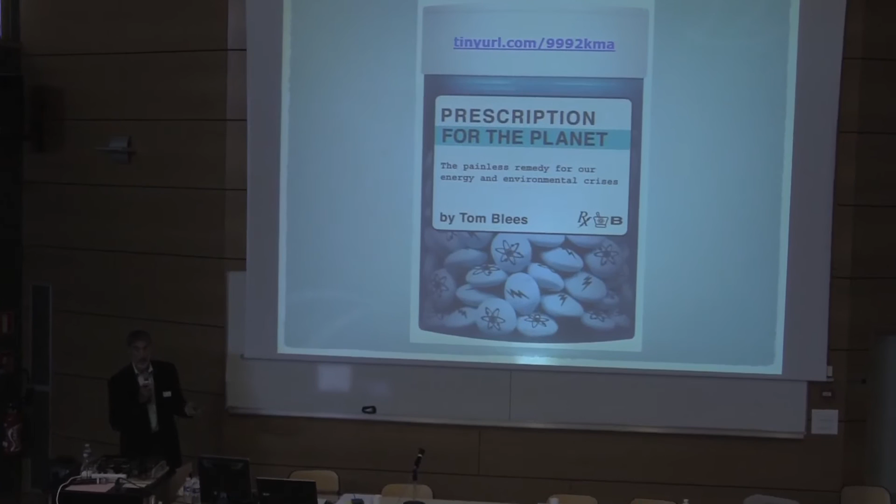I started this with a book that I wrote and published in 2008. The URL on top, you can download the book for free if you'd like, and it talks a lot about the integral fast reactor. And these slides will be available if you want them.

After I wrote the book, the two people who were my main tutors - I'm not a nuclear physicist or an engineer, I was a commercial fisherman actually for 20 years. When the people who were directing the project at Argonne National Laboratories found out I was going to write a book about this, they wanted to make sure it would be absolutely accurate. So they tutored me in reactor design, reactor engineering and physics for about 9 years.

And after my book came out, a couple of years later, they decided we should write a book too. So they wrote this book that tells the story about how this reactor was developed, and you can also download that book for free at that URL on the top.

What happened was I had found out about the integral fast reactor when I was writing a novel, and when I realized that this fantastic technology existed that could essentially power the whole planet with fuel that we've already got out of the ground for thousands of years, I decided to write the book.

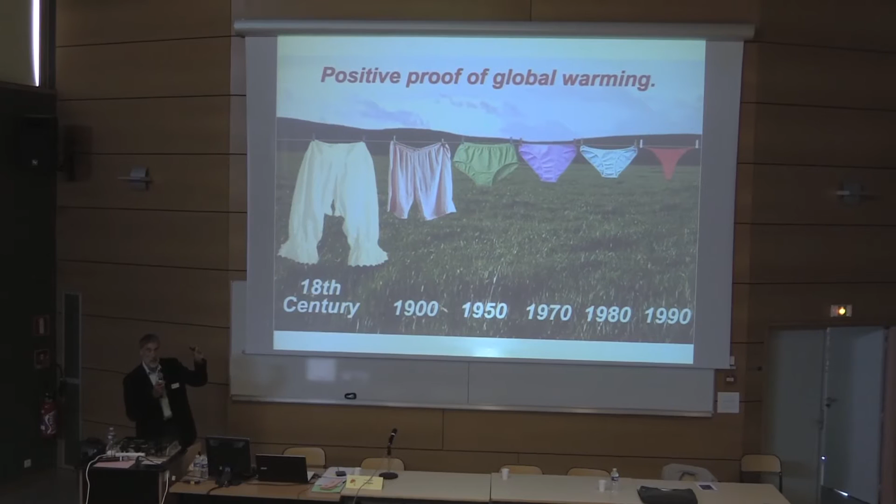Now, one of the reasons why I wanted to write the book was because of global warming, which in the United States a lot of people don't believe in, but we have proof. And like many graphs, sometimes the data gets so small that you can't see it anymore, so I had to stop at 1990. Now we have to look in.

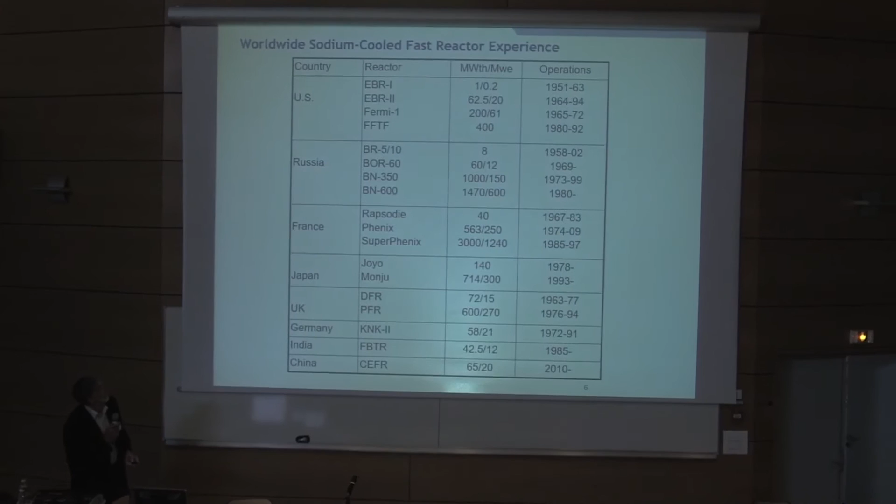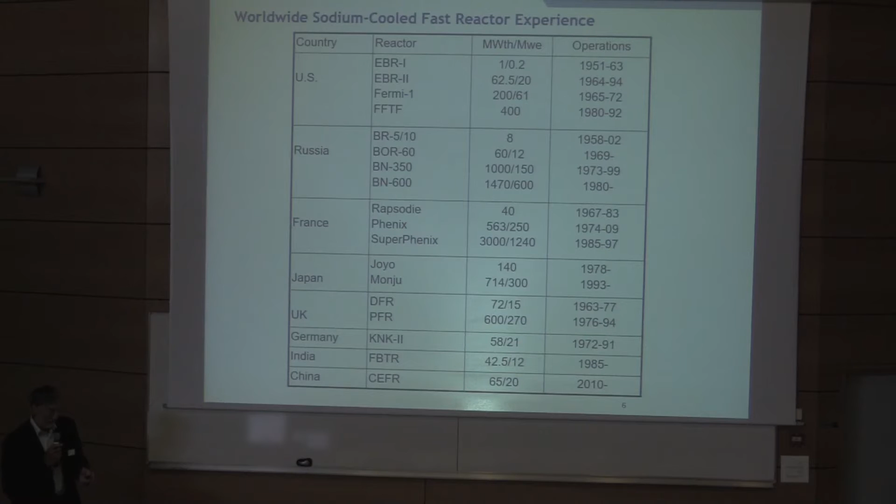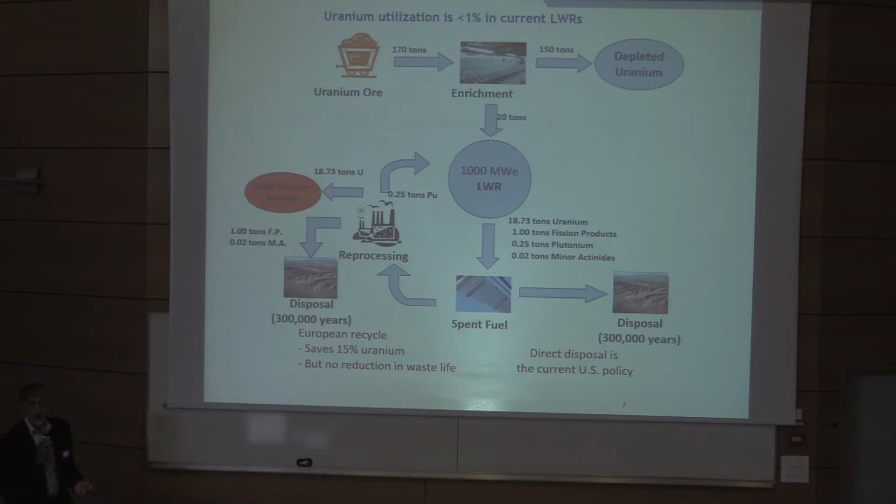Now there's a lot of experience with fast reactors around the world, over 350 reactor years of experience. These are the ones, most of them you've already probably heard of. And in the beginning, when the first electricity that was produced from nuclear power was produced from a fast reactor, the EBR-1. And the scientists at that time thought uranium was very rare and that fast reactors would just be the way that everybody would do this in the future.

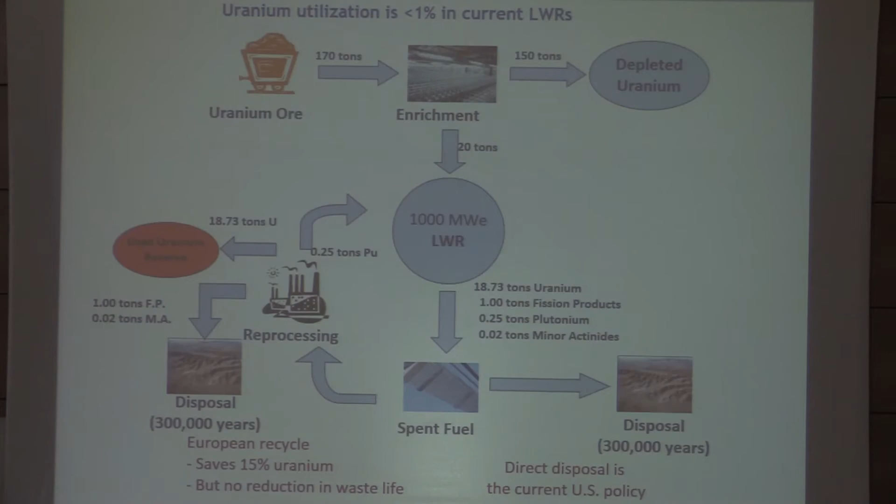But light water reactors ended up being developed for the submarines, and then they just scaled them up. So the utilization of uranium is very poor, and you have to store the waste for hundreds of thousands of years. Whereas with the integral fast reactor and pyroprocessing, the disposal time is about 300 years. And it's in a form that's ceramic or metal or glass that won't leach into the environment until long after the radioactivity has reduced to below the level of natural uranium.

I'm not going to go through every bit of these, but like I say, I'll make the slides available. I can email them to you or whatever, if you wish.

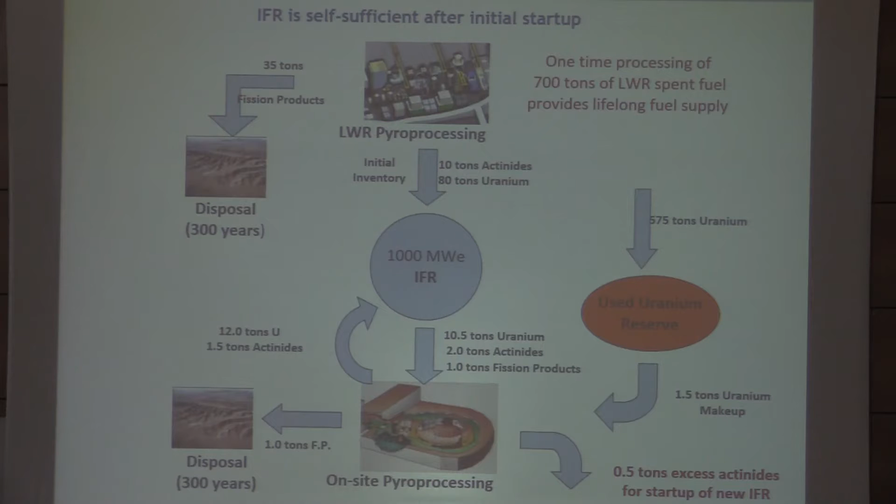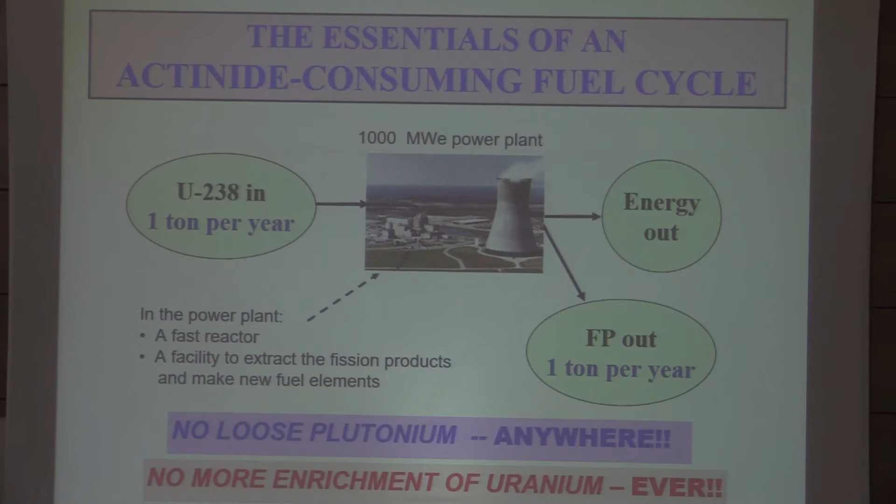So basically, this is the long and the short of it. To run a 1 gigawatt fast reactor, you bring in 1 ton of depleted uranium every year, and that's about 2 milk crates full. Depleted uranium is safe enough you could carry it in, except you can't carry a milk crate full of uranium because it's a half a ton - you have to do it with a forklift or something. But you don't end up with plutonium, with separated plutonium anywhere, and you don't ever have to enrich uranium anymore.

So the integral fast reactor project started at what's now called Idaho National Laboratory. It was Argonne National Laboratory West. And they built this reactor in 1964. They fired it up, and they ran it for 30 years.

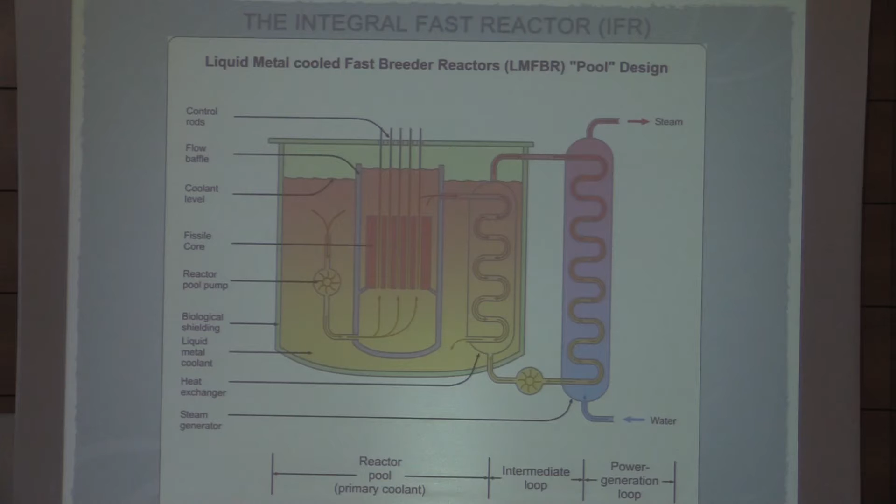This is a diagram similar to what Nicholas had. It basically shows the simplicity of a pool-type system, which operates at atmospheric pressure and is in a separate structure from the water side of the heat exchanger, so you don't have a problem with water-sodium interaction.

Now, when Charles Till decided that he was going to try to solve all the problems associated with nuclear power, he really wanted to use metal for fuel instead of oxide for a number of reasons, safety reasons, economic reasons, and practicality. The problem was that when metal fuel is fissioning, it swells up about 40%.

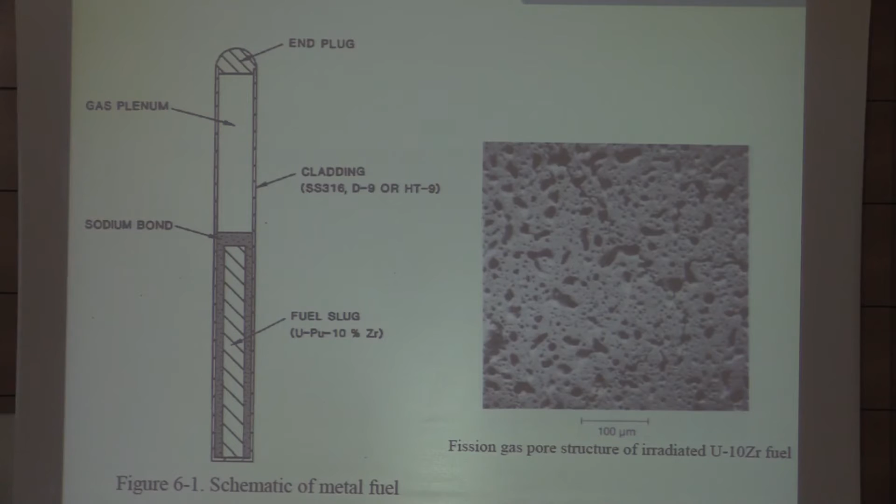And so when they first started to try it, they would just get maybe 1% burn up, and then the cladding would break. When he decided he was going to try to go back and look at this, the fast reactor project at Dounreay in the UK, the people there had been trying to figure out how to use metal for a long time.

And they said, don't bother, we've tried it, you're never going to get it to work. You can't get enough burn up, it's going to break your cladding. And so he decided he was going to still try it. So one day, they were sitting around in the office trying to figure out how they could do this.

And somebody said, well, we've got sodium on the outside. We're using sodium because it transfers heat extremely efficiently. So why don't we just make the fuel pins 40% smaller and put sodium inside the cladding? That way, the heat will be transferred from the fuel pin, and as it swells up, it'll transfer the heat.

So you don't have to machine it like you do with oxide fuel pellets, where you machine these pellets down to within microns. This way you could just put in a fuel pellet, say 4 inches, plus or minus 2 inches. It's extremely simple because it's got all kinds of space in there.

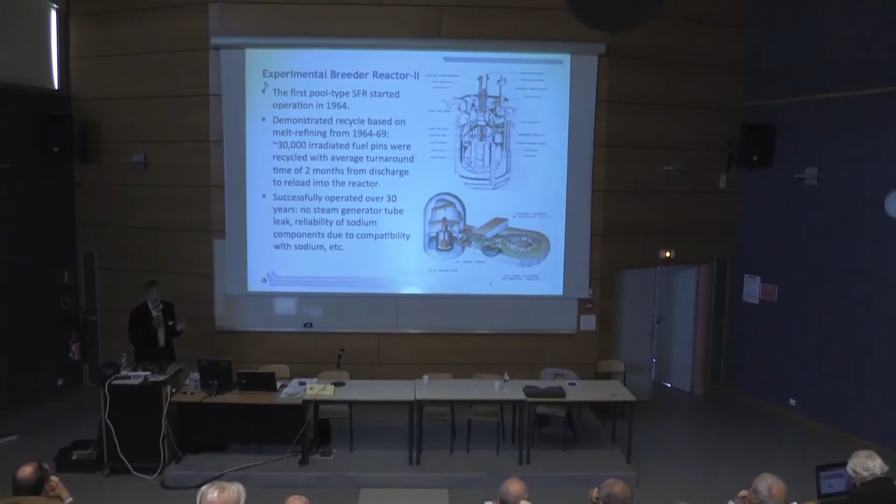They recycled over 30,000 fuel pins using this technology. So I've heard many people say that we don't know how to do this, but we absolutely know how to do this.

When the project was shut down in 1994, it was in its very last stage. The next step was to design a commercial scale recycling plant to recycle this fuel. But at the time, the US was going to put all their spent fuel from light water reactors into Yucca Mountain, so the Department of Energy told the people at Argonne: don't design this to recycle oxide fuel, just metal fuel. That was the constraint they were working under.

Then they shut down the project for political reasons, and they buried it. The Department of Energy even suppressed the information until I wrote my book.

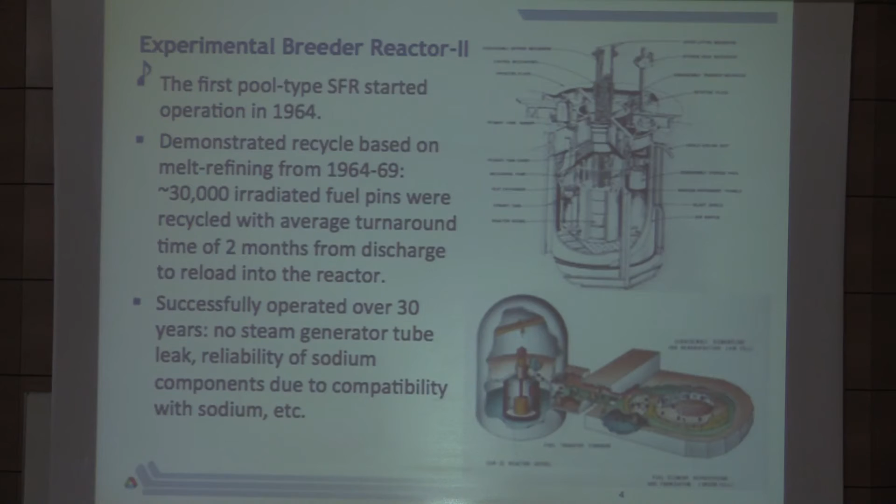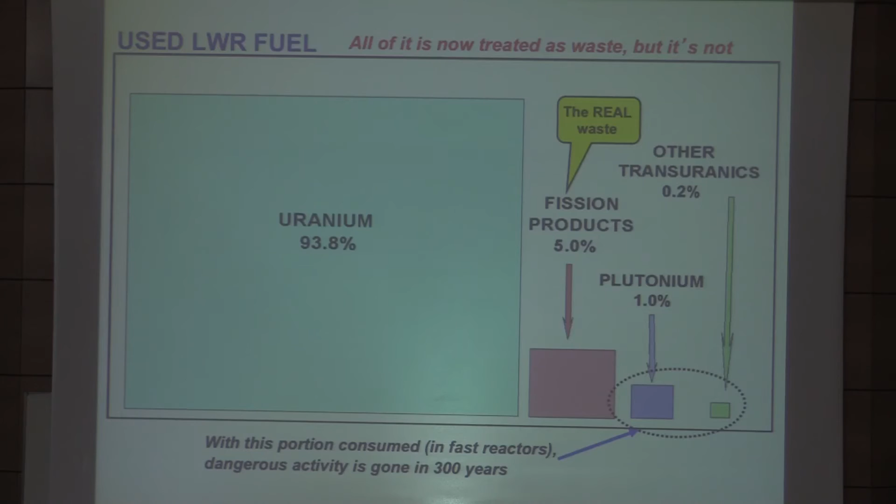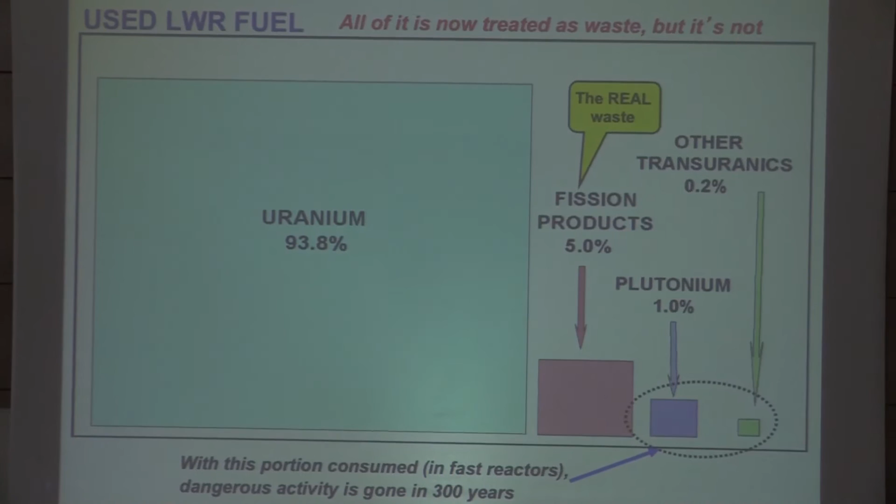So what you're looking at with the used fuel is a very small amount: 1% plutonium, 5% fission products that you want to get rid of. That's your real waste, but it's not radioactive for that long.

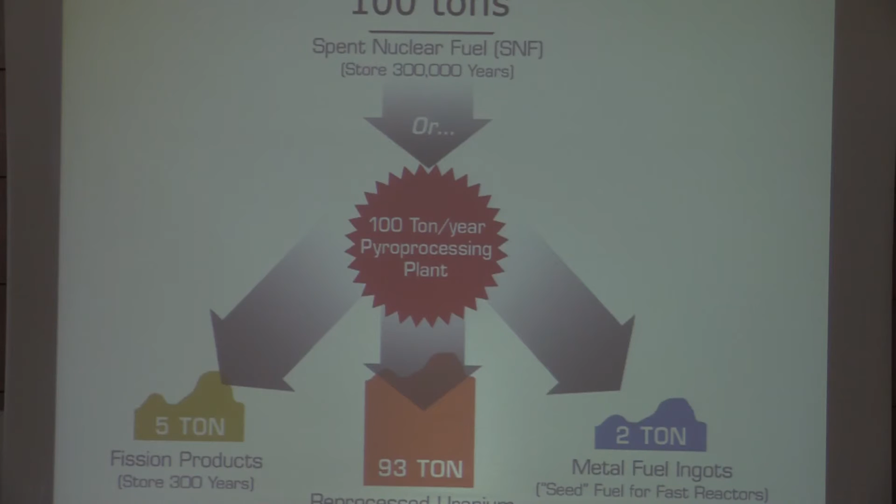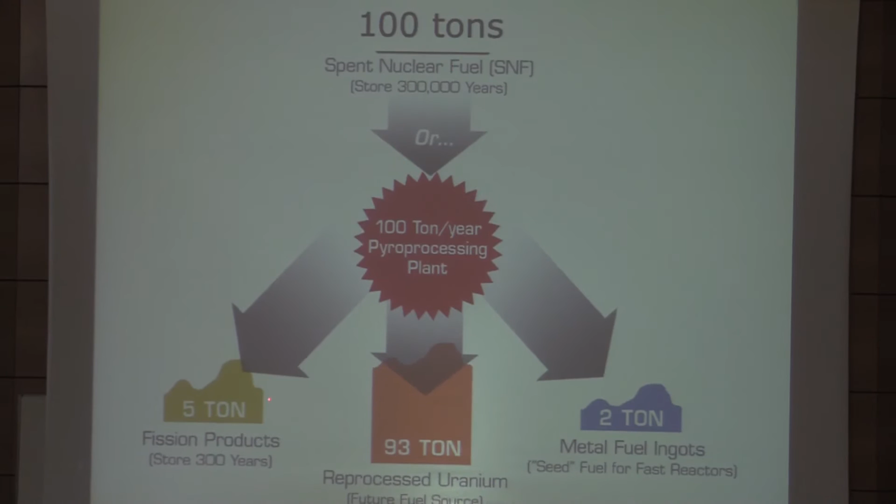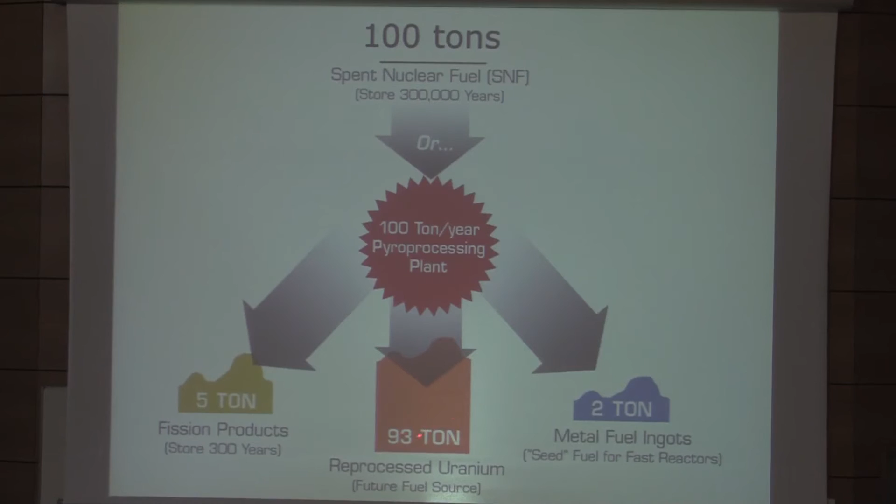The idea was to design a recycling plant that could handle 100 tons per year. If you do that, you get 5 tons of fission products that you just have to store for 300 years, and you can bury it virtually anywhere because it won't leach anything into the environment. And you get 2 tons of fuel, and 93 tons of reprocessed uranium, which is easy to store, and we have plenty of it.

About 3.5 years ago, we had a meeting with the Secretary of Energy and proposed that we design this, basically taking up where the project left off in 1994, restarting it and designing a 100-ton-per-year recycling facility. The Department of Energy agreed, and so the first 2 years of the project we did the conceptual design, and now they're doing the final design, which will be finished next year. Then we'll be ready to build this.

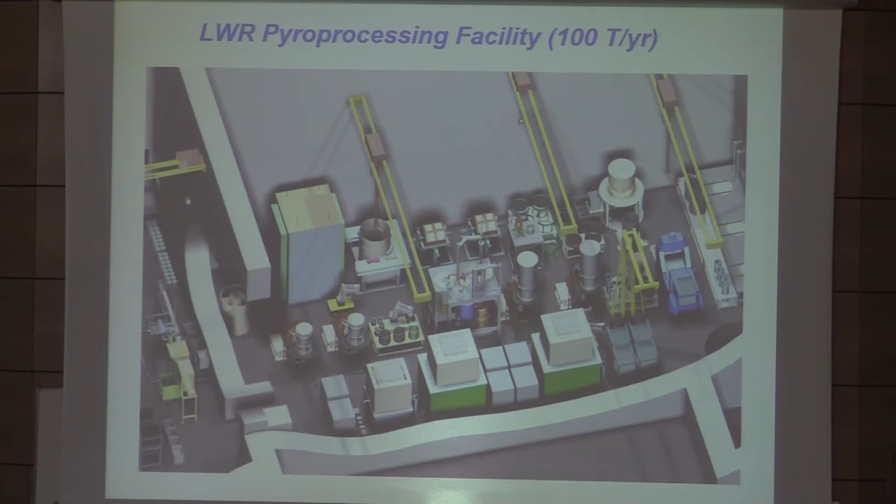It's very, very simple compared to aqueous reprocessing, which, you know, many of you have probably been to La Hague and seen the huge recycling facility. It looks like a city, but two-thirds of it is underground. This thing you can put in almost a large garage. It's not very big at all. And it'll be quite cheap.

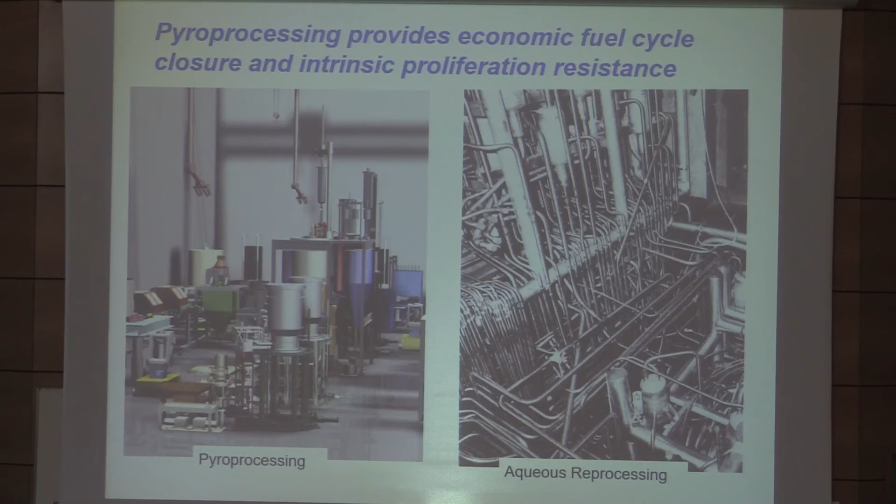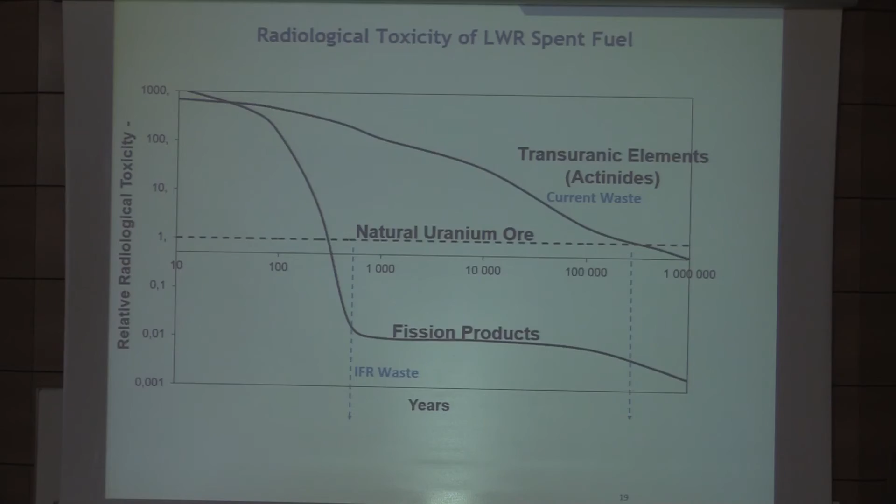But one of the important things about this is it essentially solves the million-year waste problem. Now, those of you who are engineers or scientists understand that nuclear waste is really not a problem even the way it is today. There's so little of it, it's easy to store. But it's a public perception problem. So if you want nuclear power to be powering the world, a big part of making the public aware that this isn't a problem is finding a way to solve it.

This is a logarithmic scale. It's about 300 years by the time you get to the level of natural uranium ore if you recycle it using pyroprocessing.

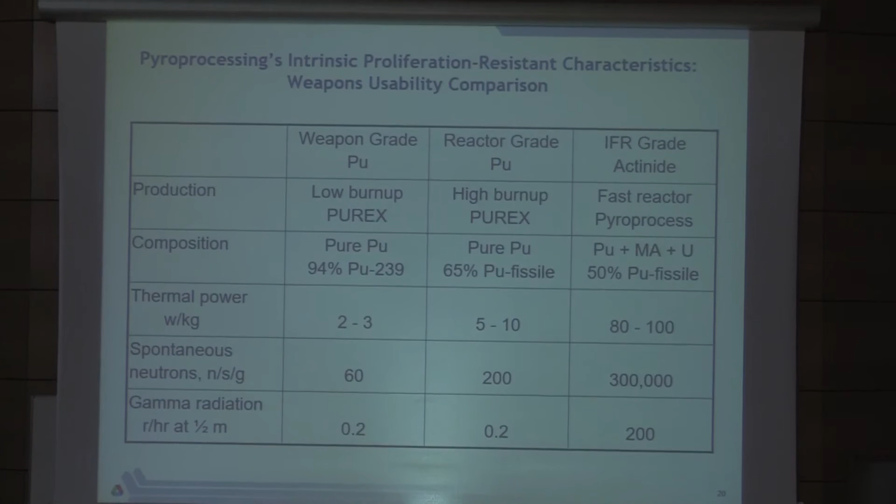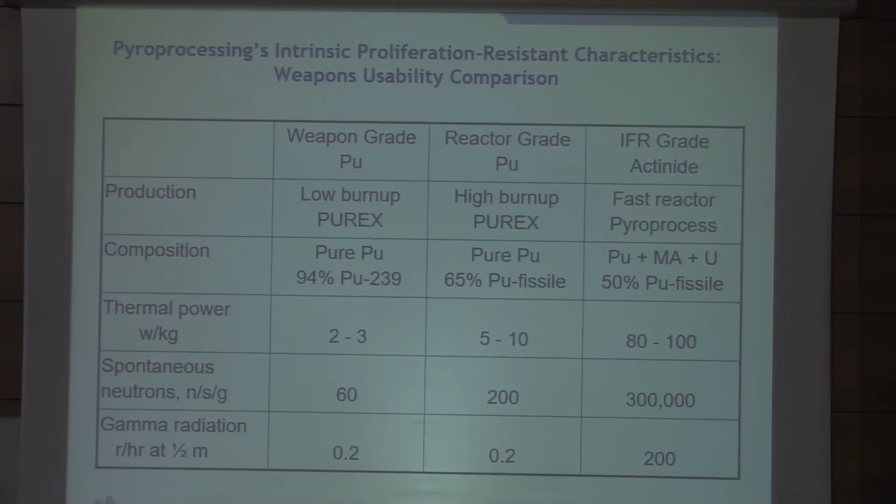Now, unlike the safety factor of getting your radiation down for the waste, when it comes to the fuel you want the radiation to be really high, because you don't want people stealing it and making it into weapons. This gives you some idea of the actinide mix you have for pyroprocessing IFR fuel. You have extremely high radiation, so the whole process has to be done in hot cells, and there's no danger of somebody stealing it and building a weapon. You can't build a weapon with something that has this much gamma radiation and other types of radiation—it's going to make it impossible to even handle.

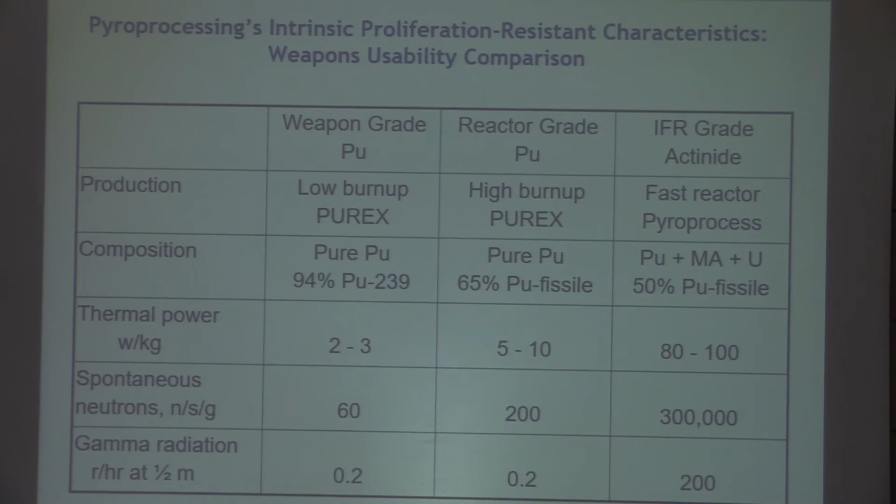Now, if you design this and then want to build recycling plants to recycle large amounts, you would build essentially cookie-cutter operations, because you have the issue of criticality. So you can only do certain size batches, but you can have certain economies of scale by building several of these in the same place. So the cost for recycling is very minor when it comes to building a recycling center on site where you have the power plant.

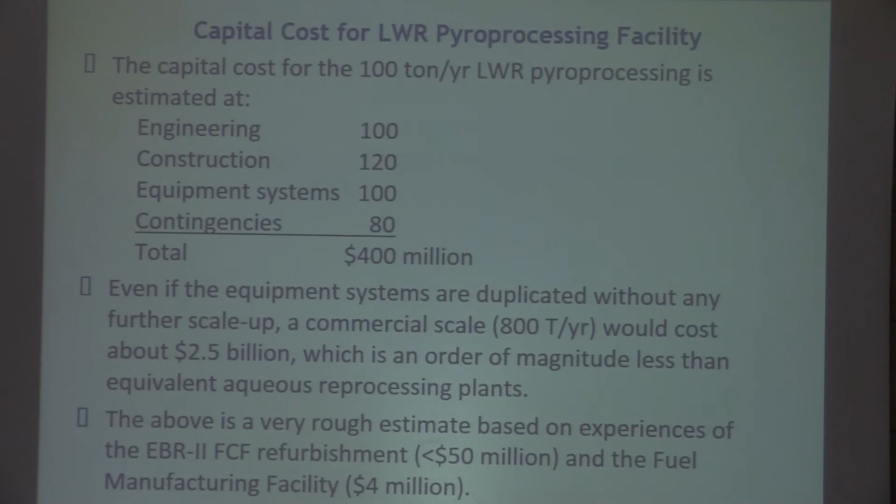In the final years of the IFR project, General Electric put together a consortium of American companies, including Westinghouse, Bechtel, Raytheon, and Babcock and Wilcox. They went up to Idaho National Lab and worked with the engineers and scientists there, and they developed the PRISM reactor.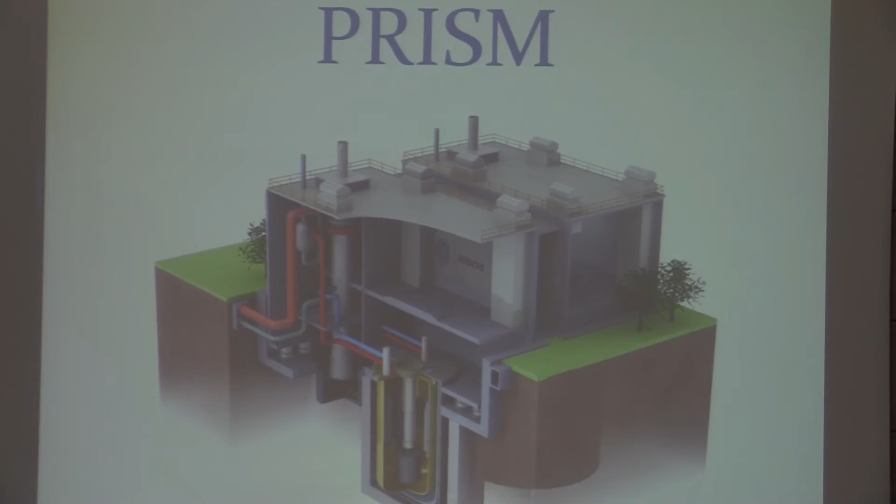General Electric has since had a small team of engineers refining the PRISM design since the mid-90s. I call it the best reactor that's never been built. It's got 20 years of engineering work on it since they developed it there.

A lot of times people will say, well, faster sounds great, but can you do it fast enough? Climate change isn't waiting for us, so what makes you think you can do this fast enough?

Well, we saw France do it, go from 20 to 80% nuclear in 11 years. At the same time, France's electricity demand was rising, it was doubling, so you actually went from 10% to 80% in 11 years.

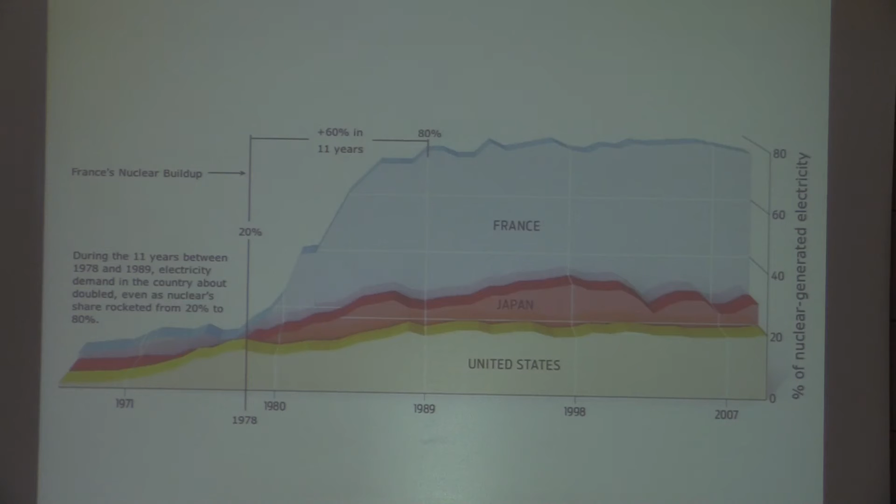And that was with high pressure reactors where you had to build pressure vessels and all that sort of thing. The PRISM is designed for mass production at atmospheric pressure, so you could definitely do it at least that fast. And I want to thank you in France for showing what can be done.

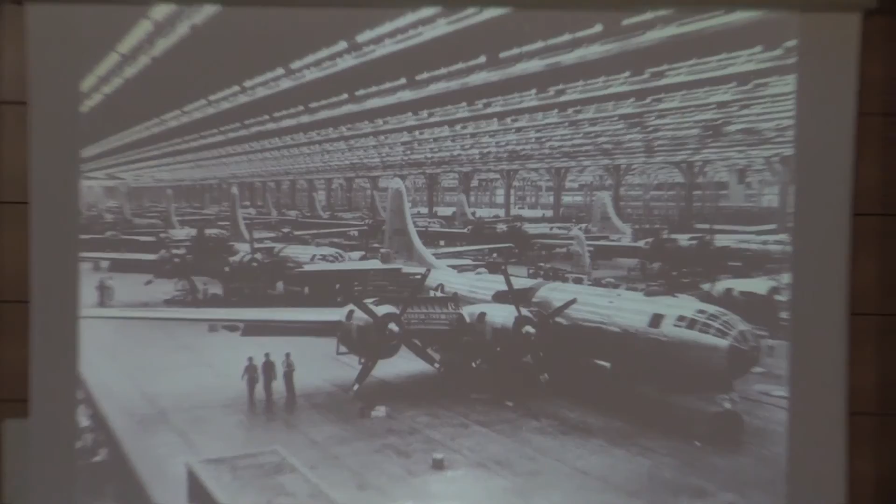I spoke over the years with the engineers who developed the PRISM reactor, and I've asked them, how complex is it to build a PRISM? If you had a factory to mass produce PRISM reactors, how complex would it be compared to building, say, a heavy bomber in World War II? And they always say it's much easier.

Well, in 1945, the US built 6,700 heavy bombers in 1 year in one country. And if you built 6,700 PRISM reactors, you would be able to produce as much electricity as the entire world produced in 2009 from all sources. So the idea that you can't build them fast enough is absolutely not true.

The bottleneck is the startup fuel. You need fuel to start them, and that's the limitation. So you would want to be building more enrichment plants. If you were going to build these very quickly, you'd want to build more enrichment plants and do it as fast as possible, and configure them for maximum breeding so that you could have a 7-year doubling time.

As far as fuel availability is concerned, it's really not a problem. The US has probably 800,000 tons of depleted uranium. Russia has almost 1 million tons. France, I believe, has sent a lot of their depleted uranium to Russia.